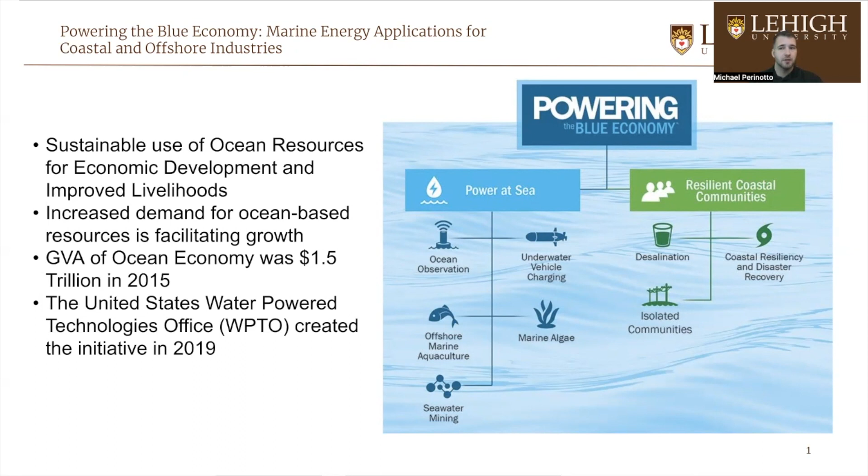The second market theme is resilient coastal communities. Climate change is increasing the rate at which coastal communities are affected by natural disasters. Industries such as desalination, coastal resilience, and disaster recovery were determined to be important for the development to strengthen coastal communities as the impacts of climate change worsen. Isolated and island communities were also investigated by the Water Power Technologies Office to determine how marine energy can improve reliability and resistance in these areas.

So, what is marine energy? Well, here's a map that shows the technical power potential of marine energy resources in the United States and territories. As you can guess, marine energy is any form of energy that we derive from the natural movement of water or thermal gradients. Out of the 50 states, the United States has a technical capability of producing 2,300 terawatt hours per year of clean marine energy.

Nearly half of this energy can be captured in Alaska alone due to increased wave heights at higher latitudes and extreme tidal currents. There's a distinct difference in marine energy resources between the East Coast and the West Coast. The West Coast technical power potential is 250 terawatt hours per year, with wave energy alone accounting for 96% of this potential. This is due to the size of the Pacific Ocean and the resulting large wave heights. The East Coast technical power potential is 460 terawatt hours per year, with ocean thermal accounting for a majority of this potential, followed by ocean current and wave energy.

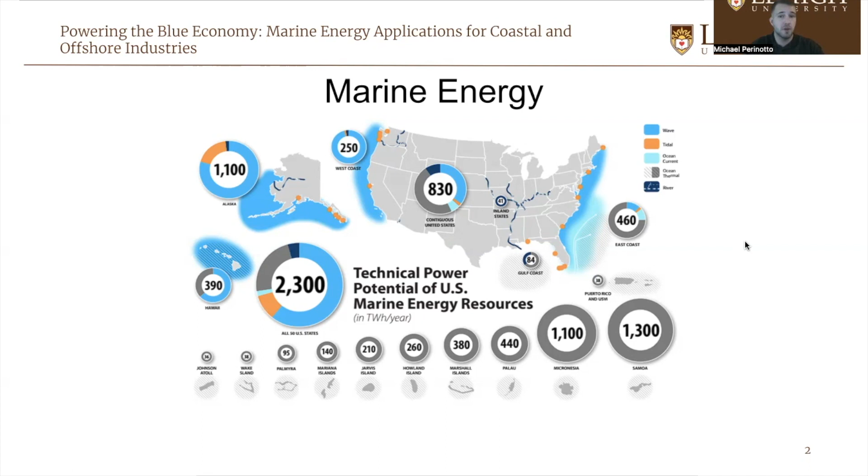Currently, there are around 334 marine energy devices that are in development or ready for commercial use. Out of the 334 devices, 25% have a technology readiness level of 7 to 9, 54% have a readiness level of 4 to 6, and 21% have a readiness level of 1 to 3. Due to the design of the technology and geographic location limitations for ocean thermal and ocean currents, my capstone focuses on tidal current energy for resilient coastal communities and wave energy conversion for power at sea.

The first side of the blue economy I explored was resilient coastal communities, specifically the desalination industry. I chose desalination due to the projected rise in global freshwater scarcity. Many industries and infrastructures overuse water. Water used for agriculture is often oversupplied due to inefficient processes that cause most of the water to evaporate. Groundwater sources are becoming more contaminated by improper water treatment methods as well.

Due to those and other factors, water scarcity is affecting 4 billion people for at least 1 month each year. Climate change will also increase freshwater scarcity due to increased evaporation rates, high volatility of precipitation, and reduced glacier and snow area.

Desalination is the process of removing salt from water. There are two primary methods to desalinate water, which are thermal and reverse osmosis desalination. Thermal desalination has been in use much longer, but with innovations in reverse osmosis technology, RO desalination is becoming the

most popular option. Between 2000 and 2020, the global capacity of desalination plants increased from 20 million cubic meters to 95 million cubic meters per day. This trend is expected to increase as natural freshwater sources become less available.

To put this in perspective, assuming that a reverse osmosis desalination plant is completely supplying an average American household with water, there would be a roughly 10% increase in the household's annual power consumption. However, since most houses are already supplied from other freshwater sources, this percentage would realistically be smaller.

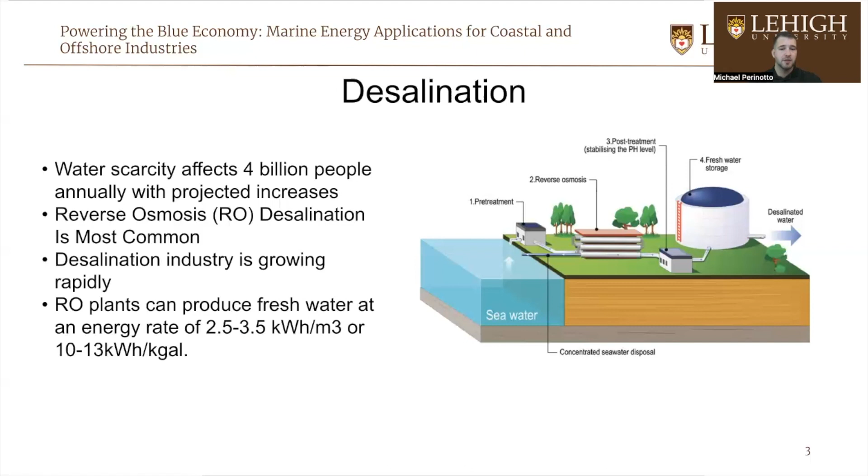To power reverse osmosis desalination plants, I explored how energy can be supplied with an array of tidal turbines. Tidal current turbines capture the kinetic energy from tidal currents, very similar to how wind turbines capture the kinetic energy from wind currents. However, there are a few advantages that tidal energy has over wind energy.

For one, salt water is approximately 837 times denser than air. So, even at lower current speeds, the energy density of tidal currents is much larger than that of wind. Tidal currents are also extremely predictable. We have over 150 years' worth of tidal data that correlate with the motion of the moon around the Earth. Additionally, NOAA provides a handy tool used to predict tidal currents for any given date in the future.

Every day we can rely on there being two high and two low tides. Flood currents peak around the high tide, where the ebb current is at a minimum, and likewise, ebb currents peak around low tide when flood currents are at a minimum. Tidal currents overall are at a minimum in between high and low tides when the flood and ebb currents cancel out. It's important to note that flood current peaks are greater than ebb current peaks.

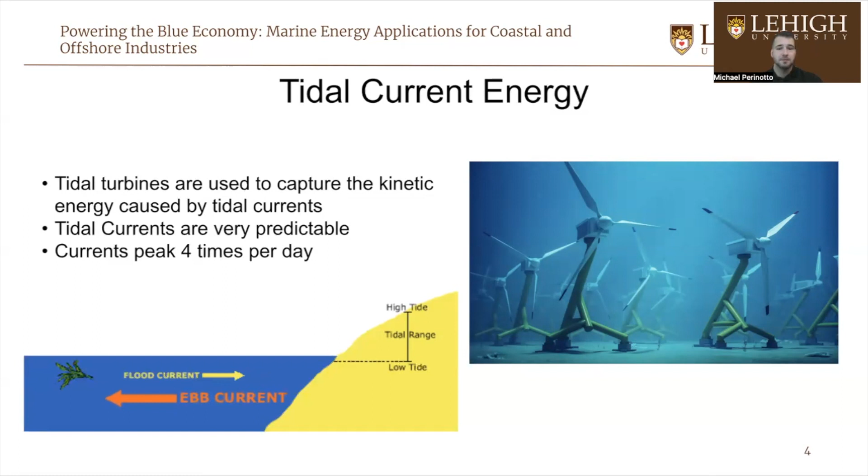Now, looking at how tidal currents can power reverse osmosis desalination plants, I made a graph comparing the hourly power demand needed to supply 1,000 American homes with desalinated water, with a theoretical output of an array of 20 tidal turbines. The blue line shows the theoretical output of the tidal array located at Hell's Gate in New York City. The equation below shows how that line was calculated.

The output of the tidal turbine grows exponentially with the radius of the turbine and the current flow velocity. Power coefficients range depending on the design of the tidal turbine, but typically fall within a range of 40 to 50%. The tidal current speed in Hell's Gate ranges from 0 to around 2 meters per second, and even though this is a relatively small flow velocity, the high energy density of seawater increases the output significantly.

Tidal turbines typically have a cut-in speed of 30% of the turbine's rated speed. I modeled the turbines with a rated speed of 2.5 meters per second, which corresponds to a cut-in speed of 0.75 meters per second, which does not affect the power output significantly. The geographic location of the tidal site determines the size of the turbine geometry and array size. Channel width and height limit the size of the turbine to prevent water turbulence from affecting downstream environments.

Furthermore, if vessels are navigating over the turbine array, a clearance of 5 meters is needed for small vessels and 20 meters for large seafaring vessels from the surface of the water. Hell's Gate has a depth of 10 meters, and the only vessels that navigate over the channel are ferries or small boats. So, to meet the clearance requirement, the turbines were designed to have a cross-sectional radius of 2.5 meters.

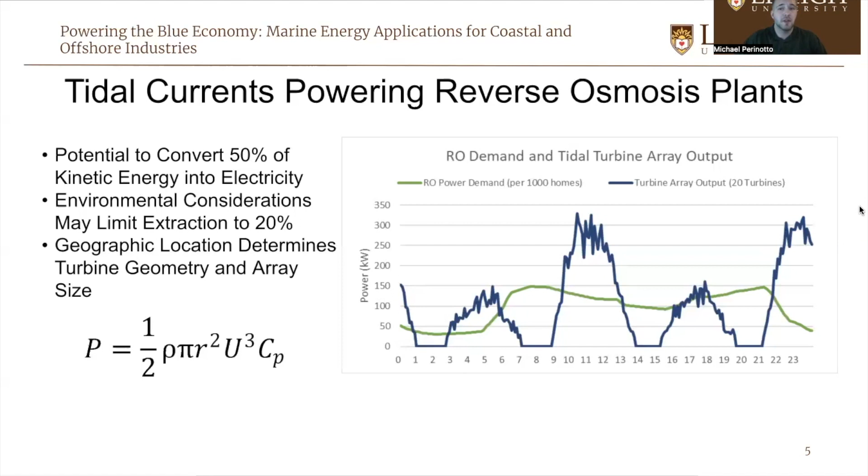greater than the demand. Overall, I found that tidal energy powering reverse osmosis desalination plants can supply fresh water to coastal and island communities. With the extreme predictability of tidal currents, communities served by RO desalination plants can see an increase in freshwater reliability

and resilience. However, for this capability to be fully realized, energy or water storage is necessary for when the tidal array supplies more power than needed for periods when the tidal array output is smaller than the demand. Or, depending on the size of the community's water demand, excess power generated by the tidal array can be supplied to the local grid.

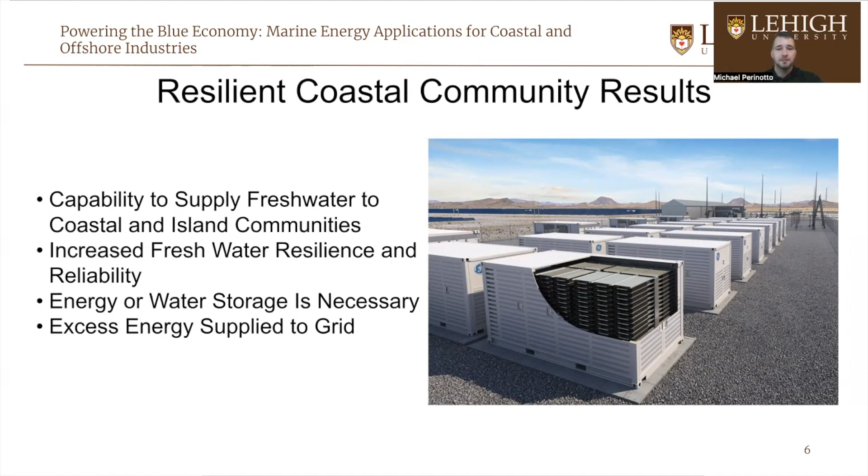Now, looking at the second side of the blue economy, power at sea, I chose to explore the ocean observation navigation industry. I chose the ocean observation navigation industry for two primary reasons. First off, the market value of the ocean observation navigation technology is rising as more technological innovations emerge. The emergence of greater technological innovations is creating a greater demand for ocean knowledge.

The sale of ocean observation navigation equipment more than doubled from 2001 to 2011, from 7.5 billion to 16 billion USD. This trend is expected to increase as new technologies are implemented on ocean platforms. The second reason was that even though there were technological innovations, most of the innovations focus on miniaturization and increasing the energy efficiencies of devices currently deployed on buoys. This is because buoys currently operate to minimize power consumption since most are powered by batteries or solar PV panels.

The DART 2 buoy shown on the left is used to detect early signs of tsunami activity and is powered by around 6 kilowatt hours of alkaline D-cell batteries. To limit power consumption, data collected on sea heights is collected 24 times in 15-minute intervals once every 6 hours.

The Scoop data buoy, shown on the right, is a modular buoy powered by 200 watts of solar PV panels and a 1.34 kilowatt hour battery. The solar PV panels provide a more consistent energy supply, which increases the data continuity and reduces maintenance costs. However, this limits the range of deployment at higher latitudes and comes with periods of intermittency depending on weather conditions. Some buoys are cabled to shore, but this increases the costs and limits the range of deployment.

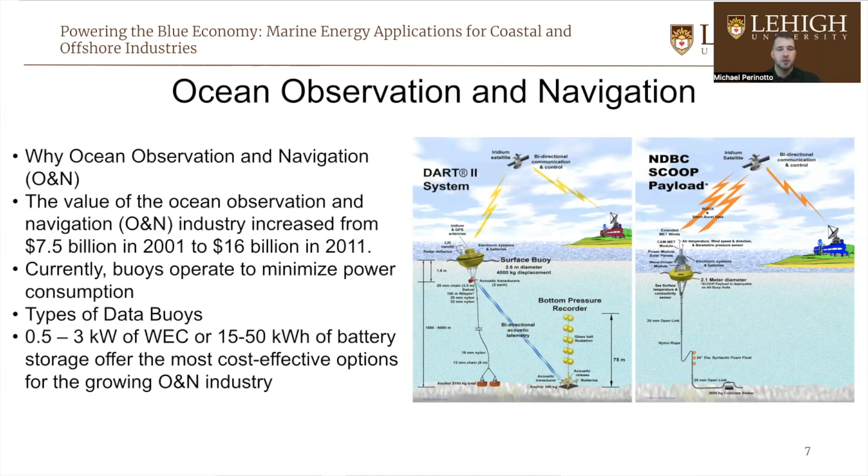So, what is wave energy and how do we harness it? Waves are caused by the friction of wind across the ocean surface. Due to the wide surface area of the oceans, wind is always blowing at some point, meaning the surface of the ocean is constantly moving. The height and period of waves vary from day to day, but looking more broadly, there are some common trends.

Wave energy is greater at higher latitudes, as shown in the image, and peaks during the winter, where colder air transfers more energy to the relatively warmer ocean water. Additionally, wave energy is greater the further offshore due to less drag between the wave and the ocean floor. Wave energy converters capture the energy held by ocean waves in a wide variety of ways. Overall, there are 4 main categories of wave energy converters that capture energy from the different types of wave motions.

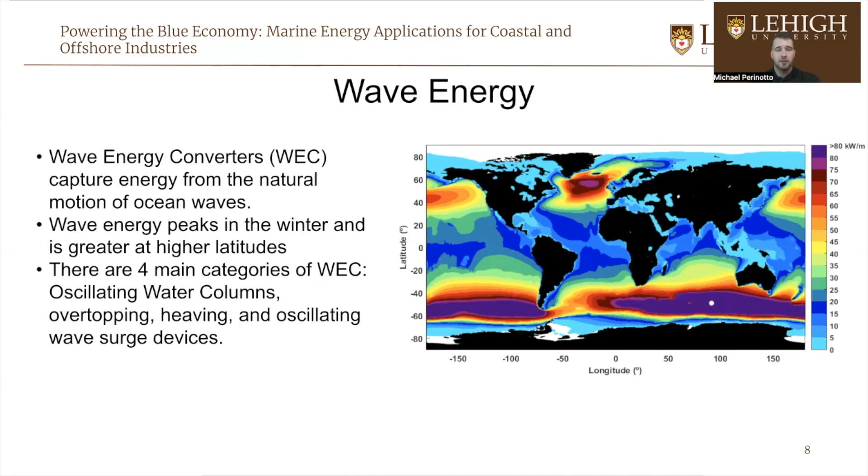Heaving devices capture the energy from the vertical heaving motion of ocean waves. The GIF on the left side shows a linear absorber. Linear absorbers float on the ocean surface parallel to the direction of the wave. The GIF on the right side shows a point absorber that captures energy from 6 degrees of motion. Heaving devices generate energy by moving a shaft vertically along a non-moving submerged body, converting linear motion into angular motion that can power a generator.

Heaving devices can be either anchored to the seafloor or float with mooring techniques. These devices are one of the best options to use for the ocean observation and navigation industry, since sensors can be housed in the floating body on the surface and batteries can be stored within the spar.

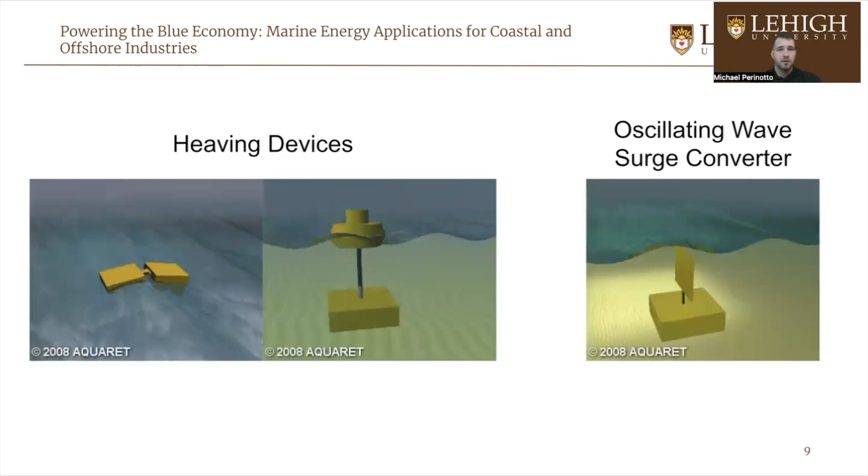Looking at the right side shows an oscillating wave surge converter. This type of device converts energy from the oscillating horizontal motion of waves. Connected to the flap would be a hydraulic system connected to a generator. These devices are more efficient closer to the coast and fixed to the seafloor at depths of 10 to 50 meters. However, they can be located further offshore with mooring techniques.

The 2 other categories of wave energy converters utilize turbines as a main power transfer mechanism. The GIF on the left shows an oscillating water column. Oscillating water columns capture energy by allowing waves to increase or decrease the air pressure in a chamber. As water rises in the chamber, air pressure increases, in turn pushing the air out through a turbine along the top of the chamber. As the water recedes, pressure is reduced in the chamber, drawing air back in and turning the turbine again.

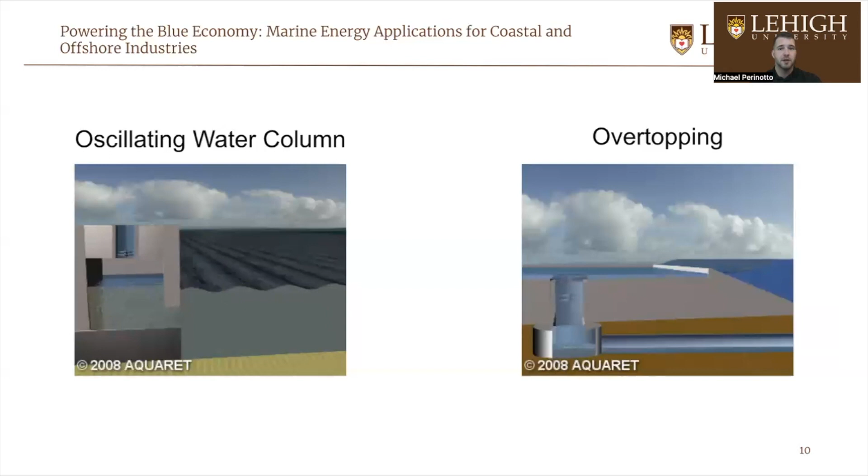Overtopping devices allow waves to overtop the device to capture the potential energy of the water as it drains through a turbine on the bottom of the device and flows back out to sea. These devices are typically large in scale and more oriented to supply grid-scale electricity. Since these devices produce way more power than needed for ocean observation and navigation buoys, they're left out of the analysis, but will be of great importance for next semester's Capstone. Both of these devices can be located on the coast, anchored to the seafloor, or floating with mooring techniques.

So, how do we know how much power can be extracted from the ocean waves? Well, for every wave energy converter that I just covered, the amount of extracted power is dependent on the capture width, wave energy density, and capture width ratio. The wave energy density for a particular area is determined by the average wave height and period of the wave. It is also multiplied by the density of seawater times gravity squared over 64 pi, which is roughly around 0.5 kilowatts per cubic meter seconds.

Wave power density can be numerically calculated in areas where data buoys are deployed. However, NREL provides an interactive map that measures the average monthly wave energy density within the United States exclusive economic zone. The capture width ratio is the percentage of energy extracted from the ocean wave. For a particular device, capture width ratios are determined through modeling and testing due to the wide variety of wave energy converter designs utilizing different power transfer mechanisms.

Capture widths also vary among devices, with heaving devices typically having the smallest capture widths, followed by floating oscillating wave surge converters and oscillating water columns. Even though there isn't a great correlation, the capture width ratio typically grows with capture width.

The graph on the right shows the power output of the three devices just mentioned 50 nautical miles offshore Newport, Oregon. A great paper created a database of over 100 wave energy converters that found the average capture width and capture width ratios of each device. Using this data and the equation shown, the average power output was found for each device, and the winter peaks can be seen at the end of the graph.

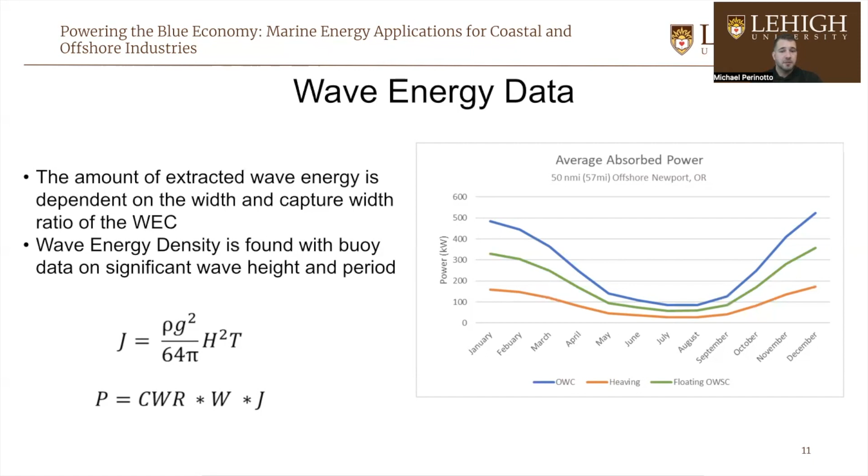Now that we know the power demand and supply, we can make some conclusions. As we saw on the last graph, the average power output of wave energy converters are much higher than the optimal power requirements for the O&N technologies. Wave energy converters must be scaled down to have capture widths of around 1 to 4 meters. Scaling these devices down would produce an average of 3 kilowatts during the summer minimum and 6 to 7 kilowatts during the winter peaks.

Due to the continuous power granted by wave energy converters, this increases the amount of data collected along with its continuity. And since the batteries don't have to be manually recharged, these types of buoys require much less maintenance, reducing overall operational costs.

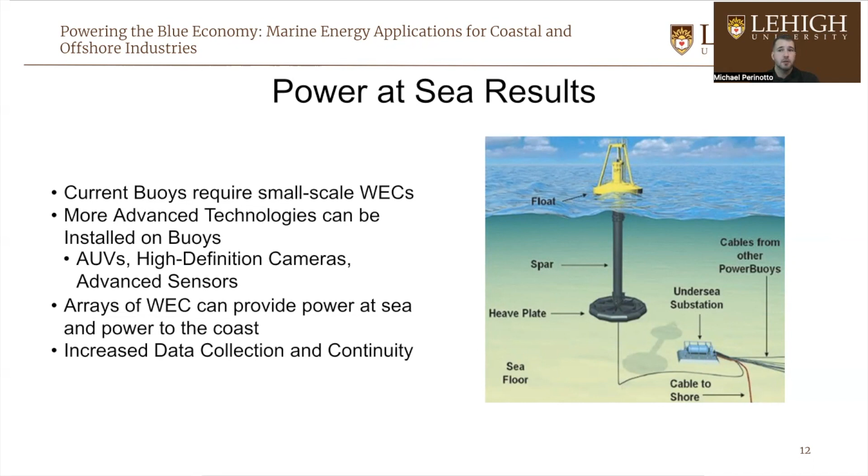Due to the unique marine energy resources that the ocean provides, this type of energy generation allows for more consistent, predictable power compared to other renewable resources. With predictable tidal energy powering reverse osmosis desalination plants, a predictable freshwater supply can be established, increasing freshwater resiliency and reliability. And due to the constant motion and high power density of ocean waves, wave energy converters offer a more consistent and reliable power supply to offshore industries and coastal communities.

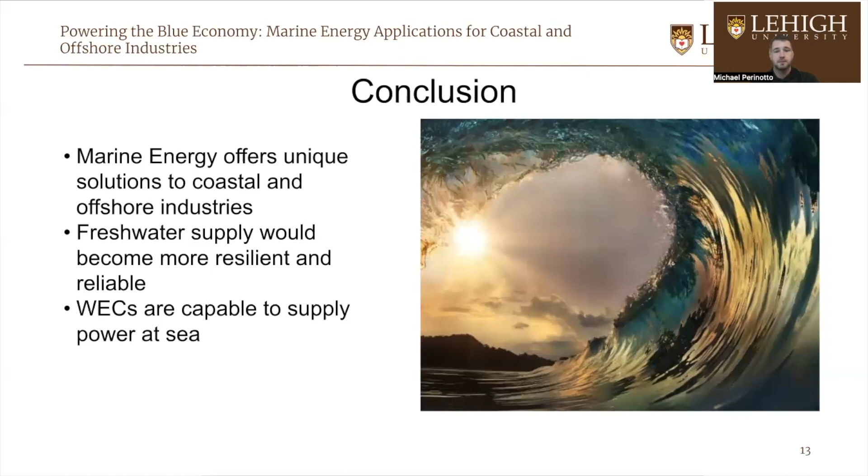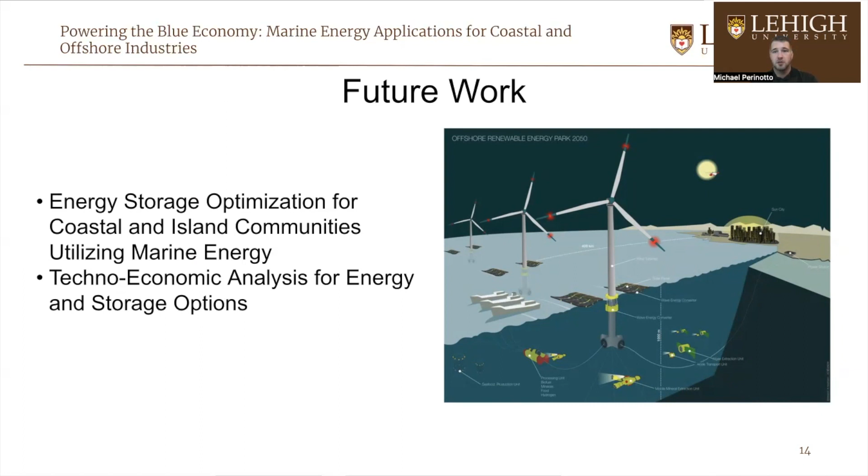This capstone was essentially a feasibility analysis of marine energy applications for the blue economy. Next semester, I will be exploring how to combine these sources of energy, along with energy storage solutions, to power a wider array of industries within the blue economy. After optimal energy generation and storage techniques are established, I will be conducting a techno-economic analysis to determine the feasibility of these energy systems. Overall, utilizing green renewable marine energy resources for applications in the blue economy will help facilitate a green energy future.